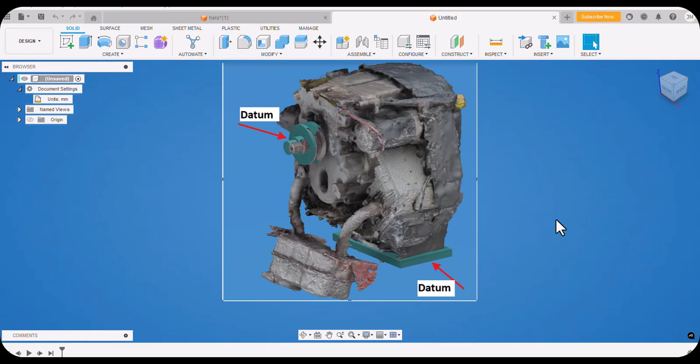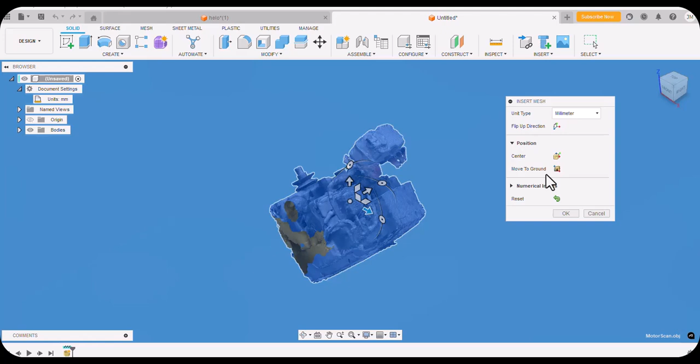I'm going to go to insert and select insert mesh, then select the file I want to insert and choose appropriate units. I don't know how this was scanned, but if it doesn't come in at the right size, the most common issue is a mismatch between units, because the original file was unitless. So either the document units or the insertion units, you have to get those right. But I'll assume neither is right and we'll have to scale after the fact. So I'll go ahead and say okay to that.

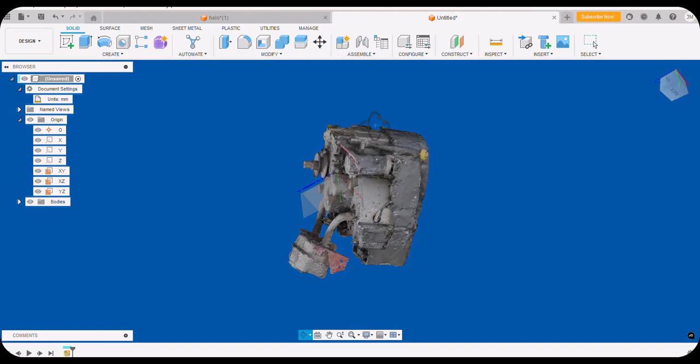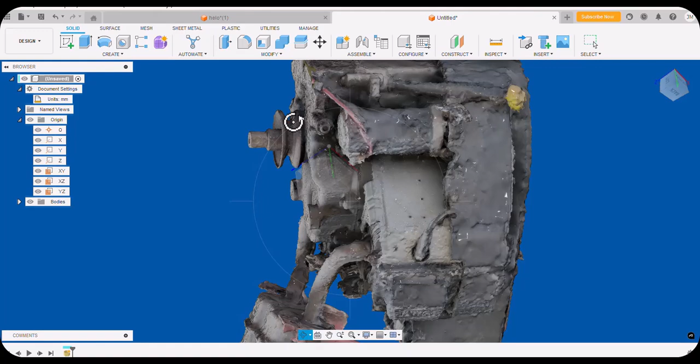So I see my scan that I've brought in. I'm going to turn on the visibility of the origin, which is buried down in there somewhere. But let's look at what the datums would be on our part. Most likely the important datums would be the bottom of the part, the assembly where it would be bolted to other components of the machinery, and the location of the pulley shaft, or output shaft, of this engine.

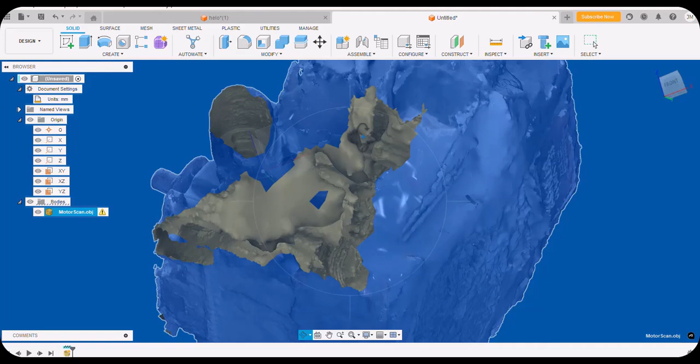If I go over to the bodies folder, we see there's a warning on this. It says the mesh is not closed. This is a scan, so there are some locations in the scan that are missing, like all of this in here. And because the scan is missing in there, it doesn't have a positive volume, meaning there's not an enclosed watertight envelope on this.

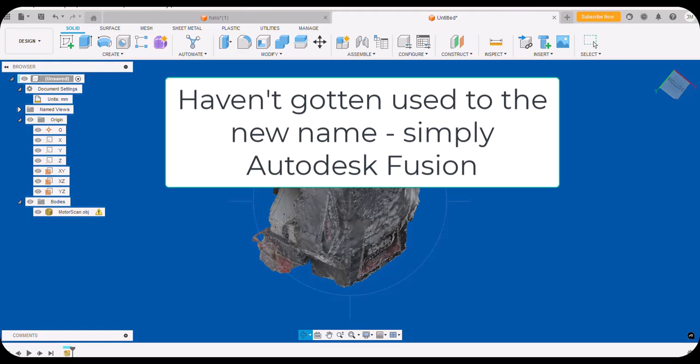Now, if I were going to do some editing of this, I would probably do that in Autodesk Meshmixer rather than in Fusion 360, and then bring it into Fusion 360. But we don't need to really do any editing on this, so I'm going to just use it as is. Now the problem is it isn't oriented correctly.

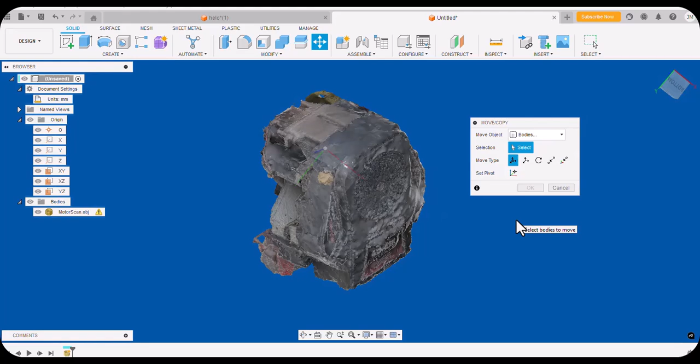So I'm going to go up here to move, select move, and then we're going to orient this the way we want it. I'm going to set my pivot point — actually, let's select the object first. Fusion automatically sets a pivot point inside the object, but that pivot point isn't relative to something useful to us. So I'm going to set pivot point, and then select the origin. Now here's the most common issue people have at this step: after selecting that pivot point, you need to say done.

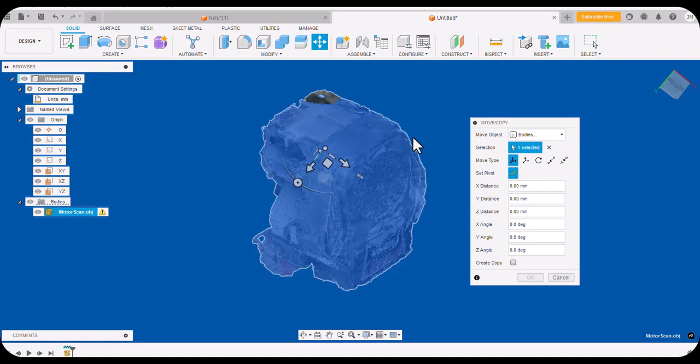Now I'm going to go to one of the common views, either top, front, or right side. Let's go to the front, and I'll rotate this around, just trying to get it approximate at first. You could put in some exact angles, but at first I'm not even concerned about exact angles, I'm just going to set that approximately.

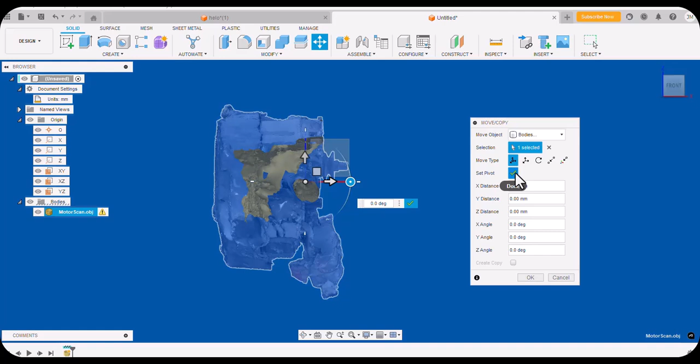Now I need to reset my pivot point, so I'll set the pivot point again as the origin, and once again, don't forget to hit done. So I click done, and let's look at this from the side view, and I'm going to rotate this around. I'm trying to get this horizontal from all three top, front, and right side views.

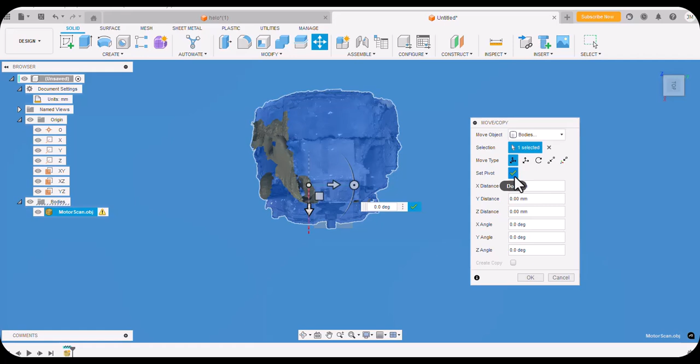So I'll go to the top view and reset my pivot again — I'll select the origin, don't forget to select done — and then I'm going to rotate this around. I'm trying to get that shaft more or less straight up and down.

Just clicking, I might not be able to get the angle I want, so I might want to type in some precise numbers. Here's my z-axis, and here is my rotation. I'll try to rotate that — that was too much. So let's try -2 degrees, and that looks pretty good there. It may or may not be exactly where I want it.

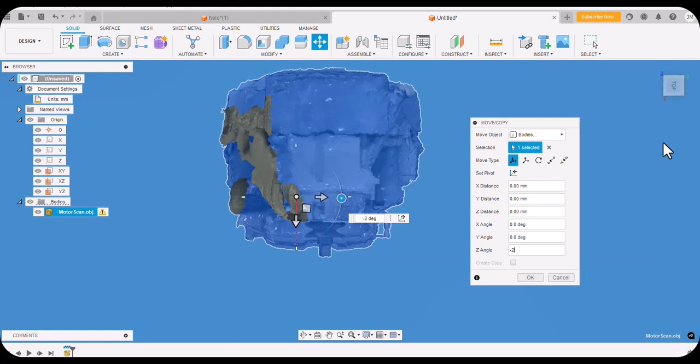Then I'm going to go to another view, and I think I've got it pretty much the way I want it in that view. Maybe I could rotate that up a little bit in this view. So I'm going to reset my coordinate system again — I might not have needed to do that in this case.

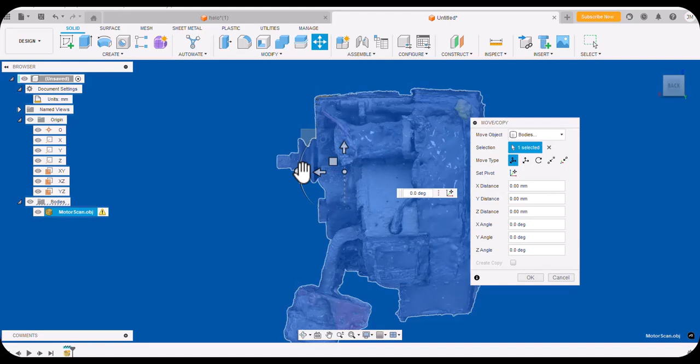Make sure you say done, and then I'm going to rotate this. I'm trying to get this horizontal — that's a little bit too much. Let's say -2 degrees. That looks pretty good there.

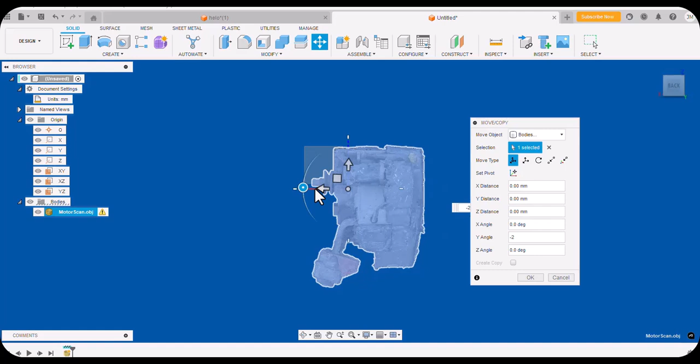Now I also want to put the location of the base of this object in a good location relative to the origin. So I'm going to drag this — I'll get hold of this square and drag it up. I want that more or less horizontal. It might be better to look at it from a different side here.

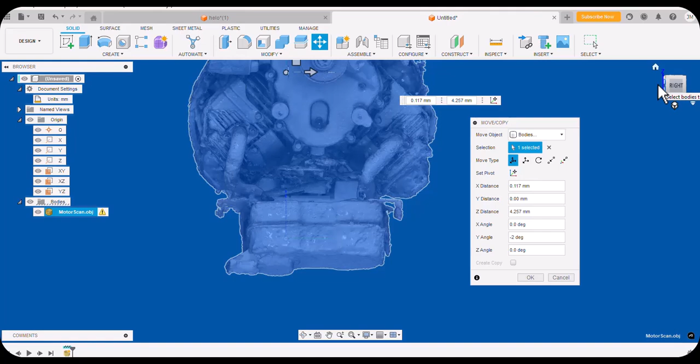It's obscured behind there, so that's caused me a little bit of issue. I want to be able to see that base. It's still just a little bit high, so I might rotate this a little bit more. In fact, I think I will rotate it more.

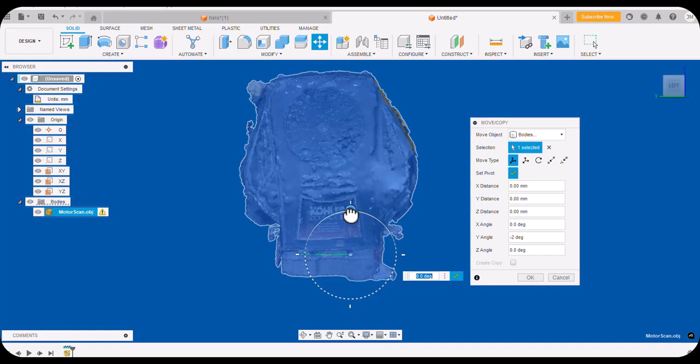I'll set my coordinate system and rotate this just a little bit this way. What I forgot to do there is hit done. Make sure you hit done, then rotate a little more, let's say -1 degree. Keep adjusting this until you get it where you want it.

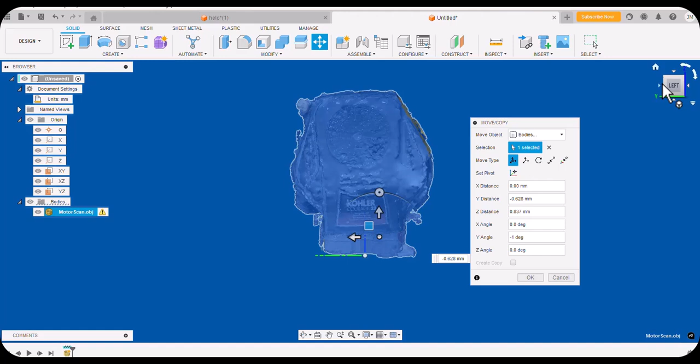Then I'm going to move this up, and try to get it about like that. But I also want to orient the PTO, or the takeoff shaft, and I'd like to have that along an axis. You can put it where you want, but I want it along an axis.

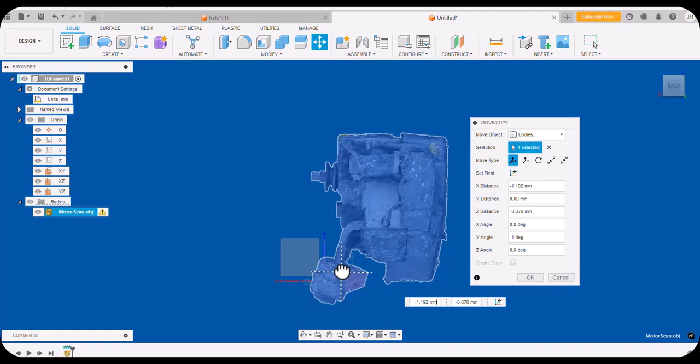So I'm going to drag this over here. Actually, somehow I got this too high. I want to get this right along that axis, like that. Let me check this from another view to make sure I don't have it too high again. Let's check it, and you might put in a sketch at some point to help line this up.

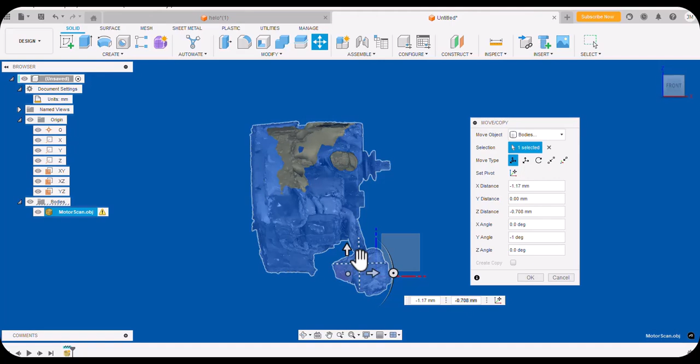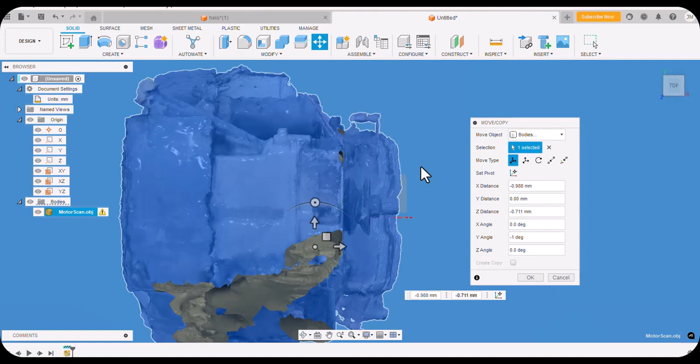Be careful, because I am maybe moving it in 3 directions, or 3D space, in a way that's confusing. Now I'd like to see that axis from the top view. It's kind of hard to see right there, but I want it on that axis too. Let me just, to be sure, put this back on the origin on the x-axis.

If I have trouble, I'll just say okay to that, and edit that move again, and I'll reset my axis to the origin, and then try to move it. What I forgot to do there is the done.

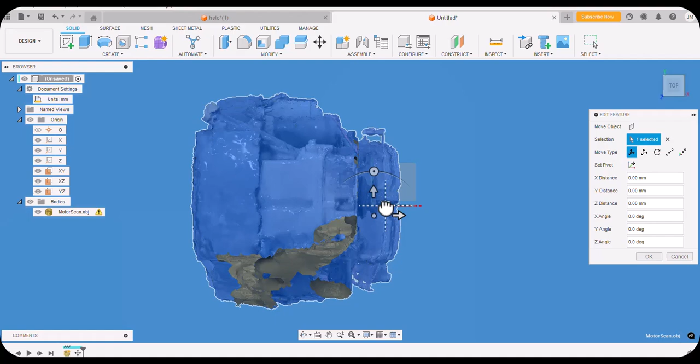So I have this shaft, the takeoff shaft, oriented along the x-axis, and then from the bottom, I have the bottom of the part oriented along this axis. I don't know what axis I said before, but along this axis.

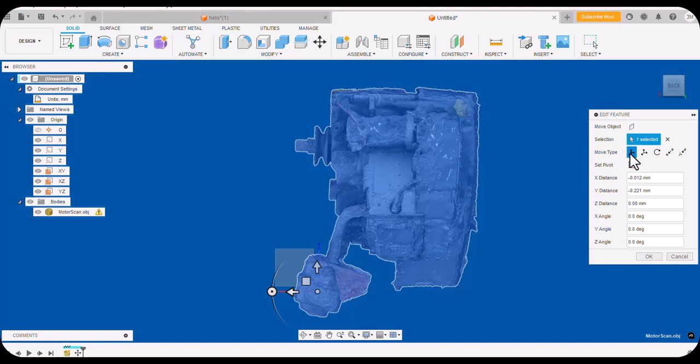Now, once I've got it lined up where I want, of course, at some point if you need to scale it, go ahead and scale it, and then you may need to move things around again. But once I have it where I want it, I'll create a couple features on here.

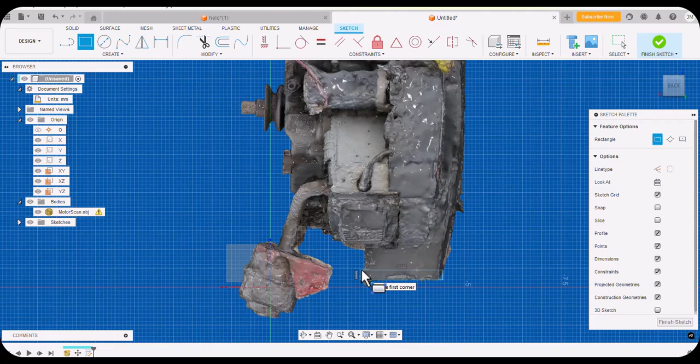And these will just be for reference. So I'm going to say maybe this is the base plate of this motor right here, and go ahead and dimension that relative to the origin point, and then extrude that. So I'm going to rotate around, and extrude that.

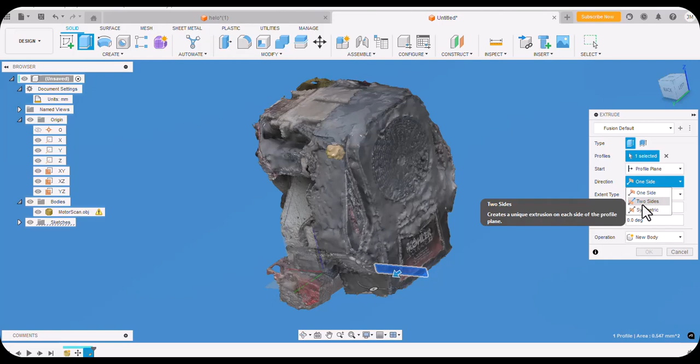So we don't need to have the entire motor modeled. We can just model a portion of it, and that gives us a size for placing everything else into the assembly, or reference. So we're just doing this as reference.

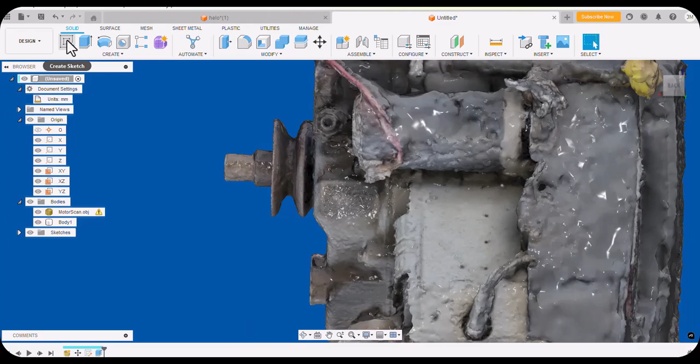Then I may do this pulley, and this is a little bit at an angle. Again, it's just a reference, so it doesn't have to be perfect when you are modeling this. You're just trying to get it in close for the picture.

If you want your geometry to be perfect, you can use your calipers to measure all this geometry to make it perfect. I'm just going to put it in here by eye, and you can then put your dimensions on as necessary.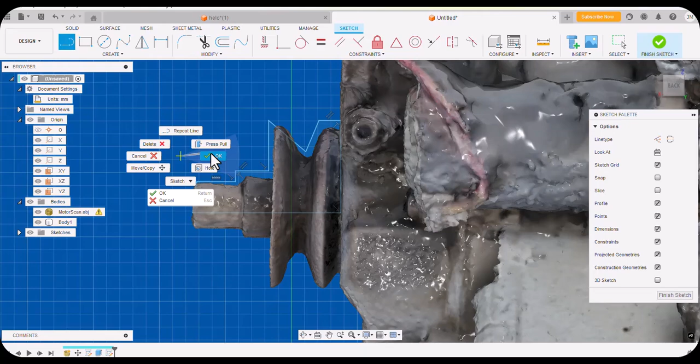I want to go halfway. I may put a vertical constraint on this, and I probably put it so that I could put arcs in here. With your calipers, you can measure and get it right.

I don't really like that, so I'm going to delete it and put it in again. But with your calipers, you can get it to precise geometry. All we're looking for right now is... actually, we do want this precise.

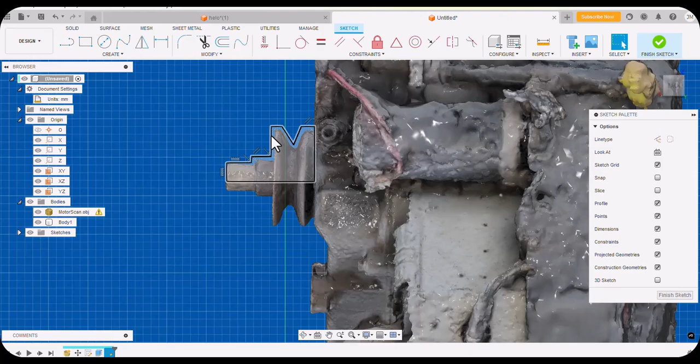So you can measure this, and you can measure this. The rest of this is just for reference. I'm going to change this line to a center line. Actually, I just changed it to construction. I meant to change it to a center line, so I'll change that to a center line.

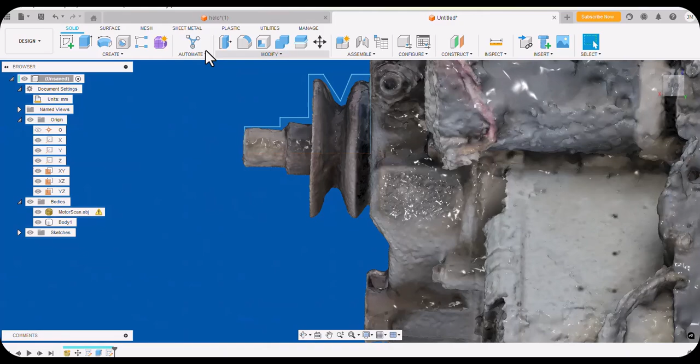And then I could do a revolve. I made this a little bit too big, so you make it smaller, make it the size you want. Let's turn off this, so here I have my base of the motor and the takeoff pulley.

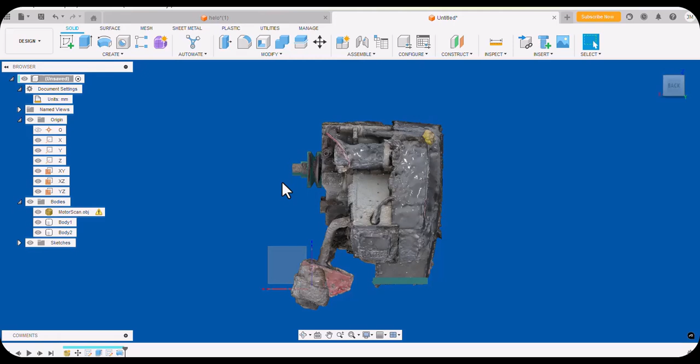And then the rest of this, I just need to make sure I don't interfere when I'm building my other components, that I don't interfere anywhere with this motor. Then I save this, and to use this in my assembly, I just insert this as a reference into the assembly and then orient it as I need it.